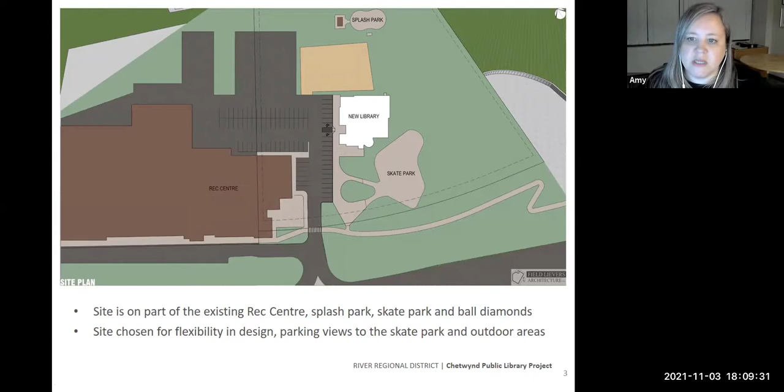The design team considered several locations for the library, including aligning with the rec center and North Access Road, and in the current location behind the skate park. The current location was chosen to allow for flexibility in the design, parking views to the skate park, and to accommodate the outdoor areas adjacent to the proposed library facility. Next slide.

The concept that began with the Library Advisory Committee was the living room of the community. This building serves a variety of functions for the community members, including children's programming on the north side, children's reading and play area just outside of that children's room, a teen reading and lounge area, the adult reading and lounge area with private seating space along the windows facing the park, and a public computer area.

There is meeting space that can be 1 large room or 2 small rooms, a makerspace and virtual reality room that can also be used as a private meeting room, a storytelling room that can be open or closed to the main area as another meeting room, staff areas, a cafe and sitting area, and an outdoor gathering area. Next slide.

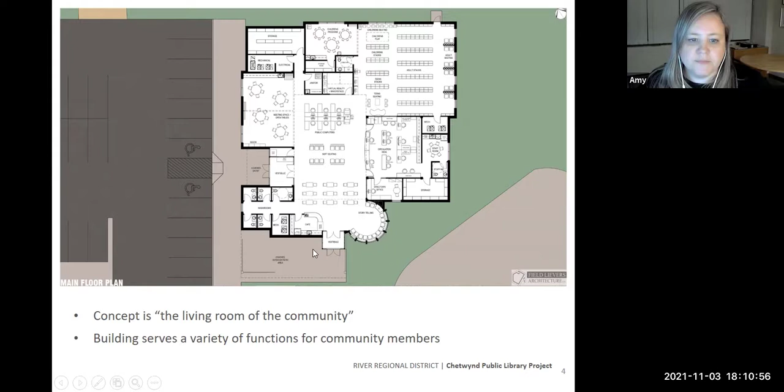This is an aerial view of the new library.

The structural design of the new library building will include a slab on grade with spread footings and grade beams, as a single-story building with no basement or crawl space. The main structure will consist of heavy timber frame with glulam columns and beams with wood infill. The roof will consist of structural insulated panels that span between roof joists, with a sloped metal roof, as seen in the image.

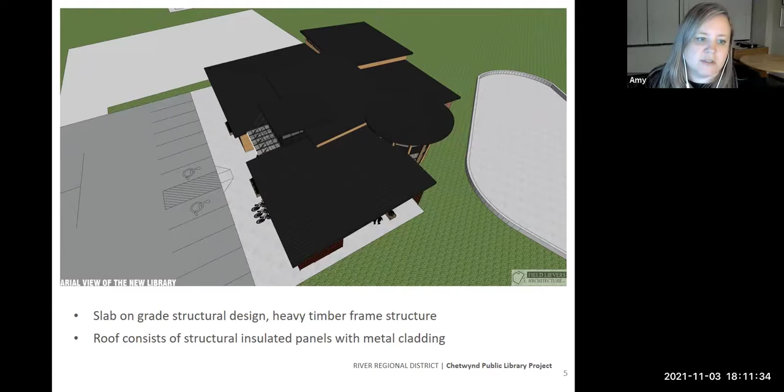This shows the front of the building with the outdoor plaza facing the highway, with a landscaped space in front of the skate park. This outdoor plaza area will be protected from the elements by a large roof canopy.

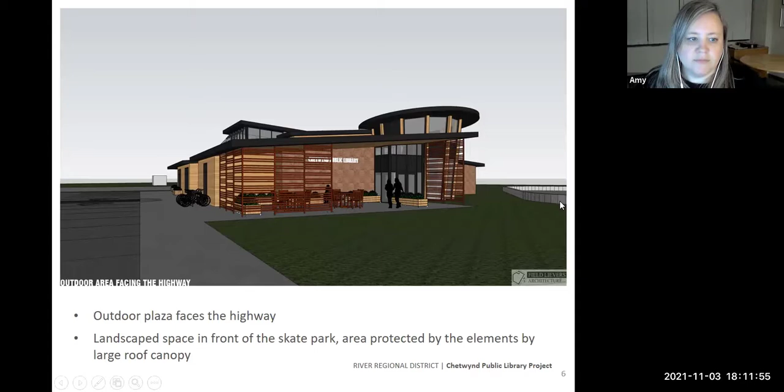The windows will be triple glazed, low E, argon filled, and the roof and walls will have high insulation values for a thermally efficient building envelope.

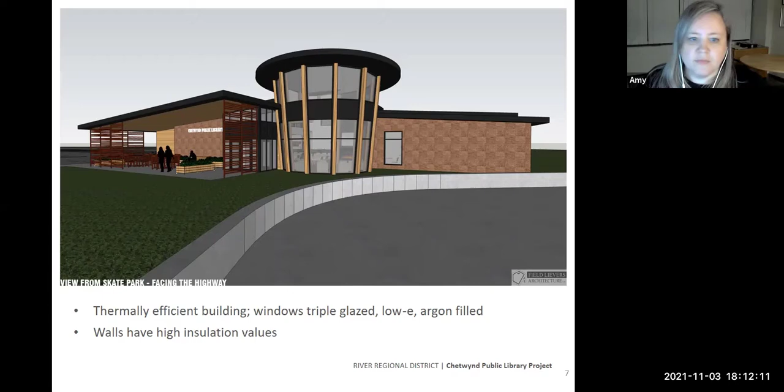This is the west side of the building facing the parking area. There will be clerestory windows at the upper level to bring light to the center of the building.

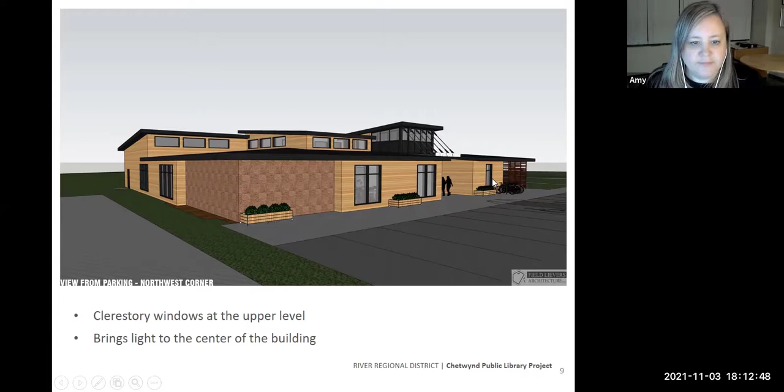The main entry of the building will feature a large expansive glazing with a canopy, signage, and a window for the exterior book drop.

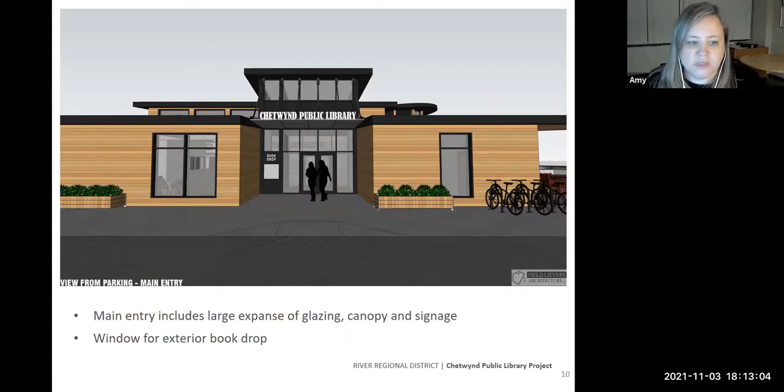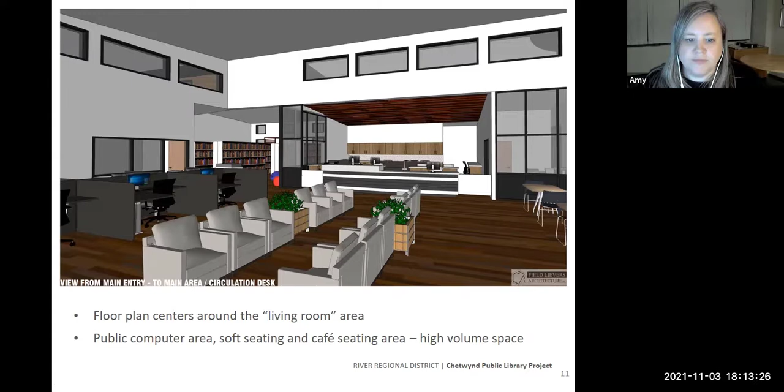This area is the heart of the library, from which you can access the cafe on the right, washrooms, meeting rooms, the storytelling room in the center, the book stacks, and the circulation desk.

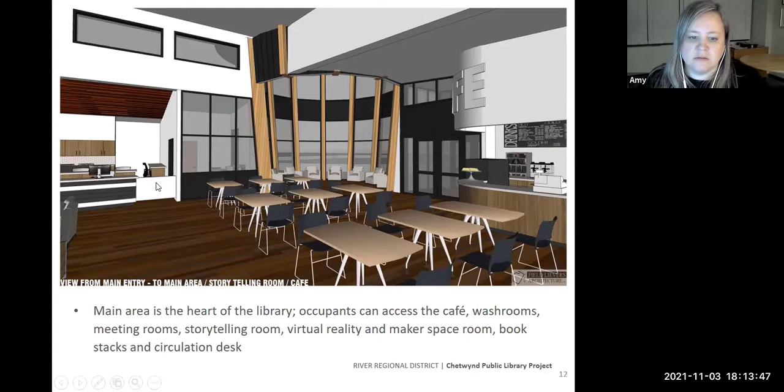This area shows the cafe located right next to the doors that lead to the outdoor plaza, and the open cafe sitting area is open to the storytelling room on the left.

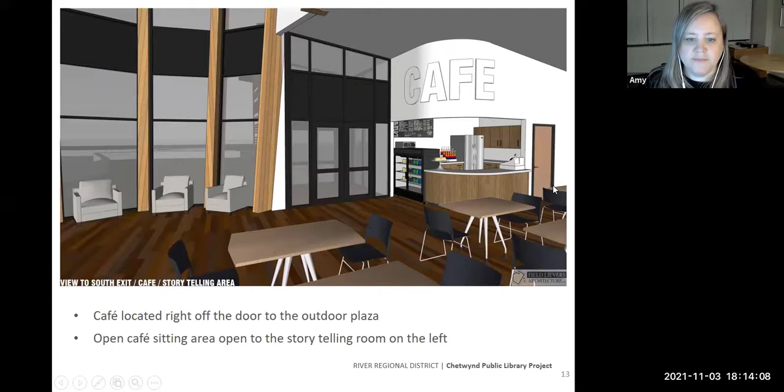The storytelling room is an important element to the design that acknowledges the culture of the Chetwynd area and can be used for storytelling, meetings, and group gatherings, in a space that encourages sharing and acknowledgement of the past and Indigenous culture and history. It will bring people together in an inviting room with a feature fireplace.

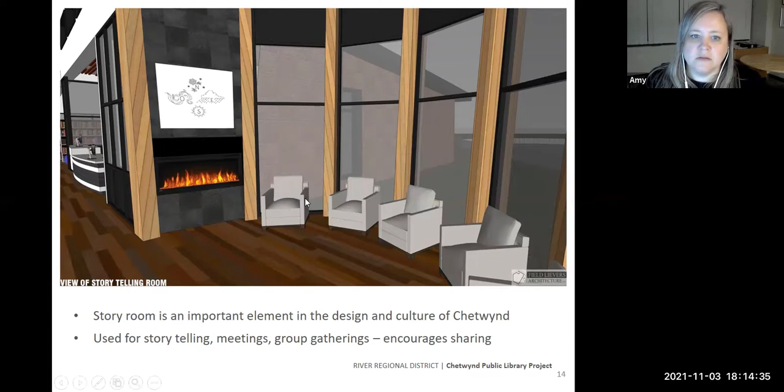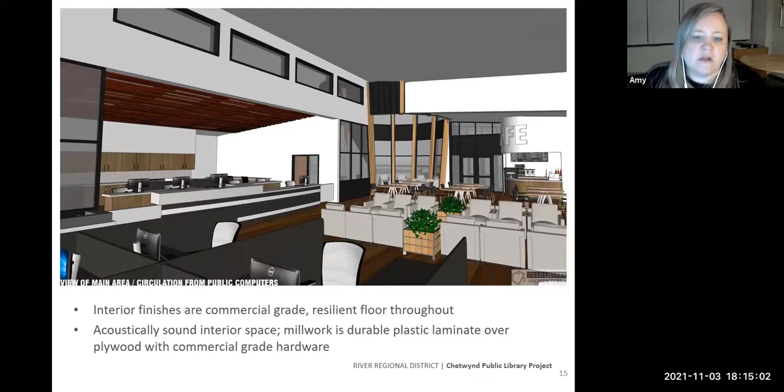Interior finishes will consist of commercial grade, resilient floor throughout, painted drywall walls, vaulted ceilings that will contain lighting and acoustic panels as required. Millwork will be durable plastic laminate over plywood with solid surface countertops and commercial grade hardware. Doors will be solid core wood with a stained veneer finish and painted metal frames.

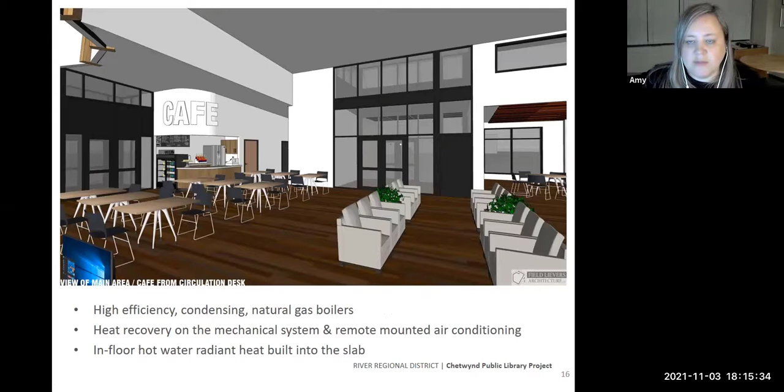The building will have high efficiency condensing natural gas boilers. The air handling units will also be condensing gas fired high efficiency units. We will have heat recovery on the mechanical system and remote mounted air conditioning units. There will be in-floor hot water radiant heat built into the slab, making for a stable, comfortable indoor environment.

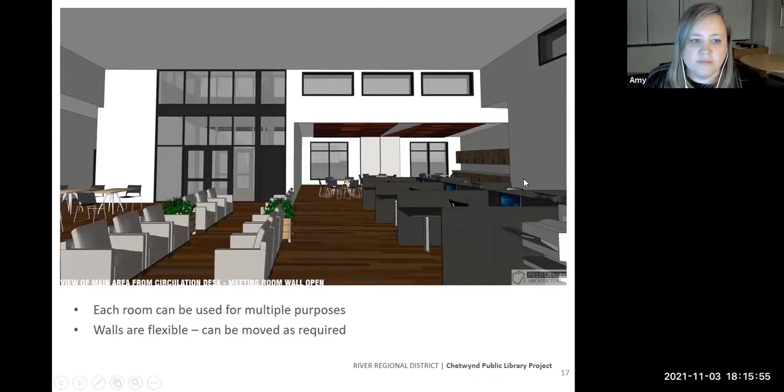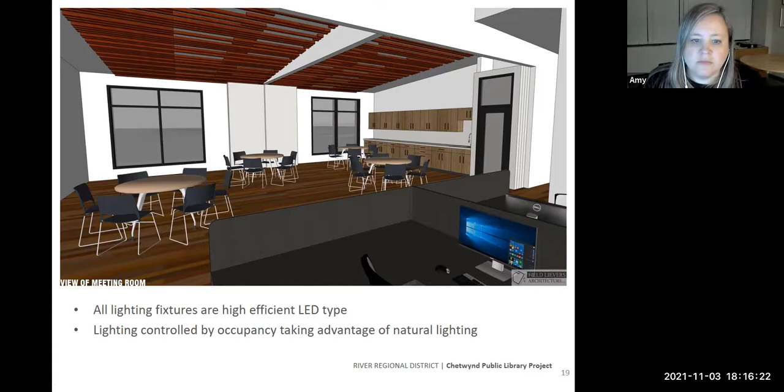Other sustainable building features include high R value insulation, triple glazed low E windows, local low VOC materials with a high recycled content, rain and stormwater management on the site, construction waste management during construction, and future consideration for other sustainable initiatives such as solar panels.

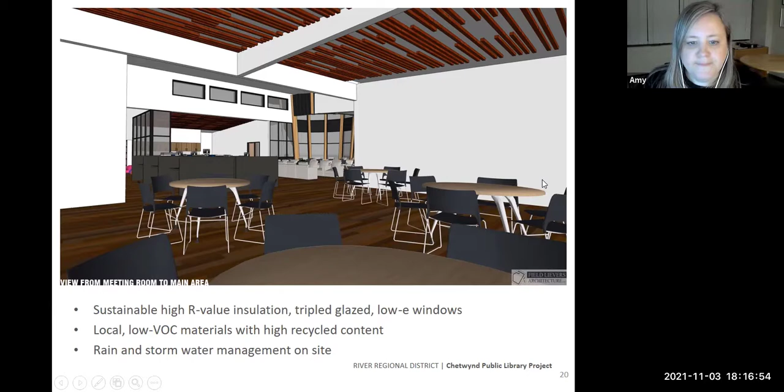This is a high-level view of the reading stacks. Natural light has been brought in to all usable areas in the space, with views to the surrounding park, rec center, splash park, skate park, and outdoor plaza.

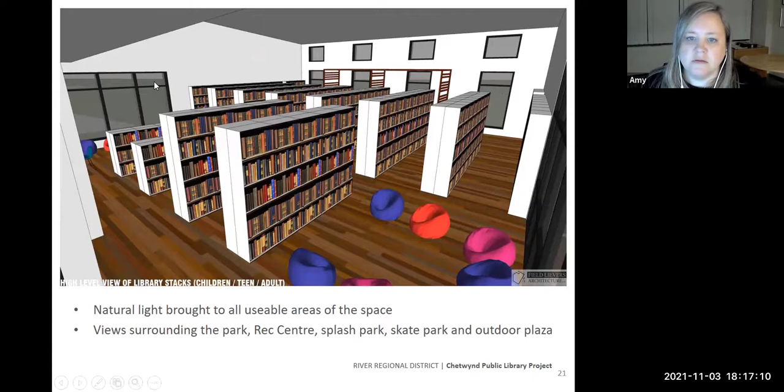The stacks area contains soft seating areas within for each user group, the children, the teen, and the adults, where people can tuck away with reading materials as they wish. This concludes the design portion, and we'll go back to Director Rose.

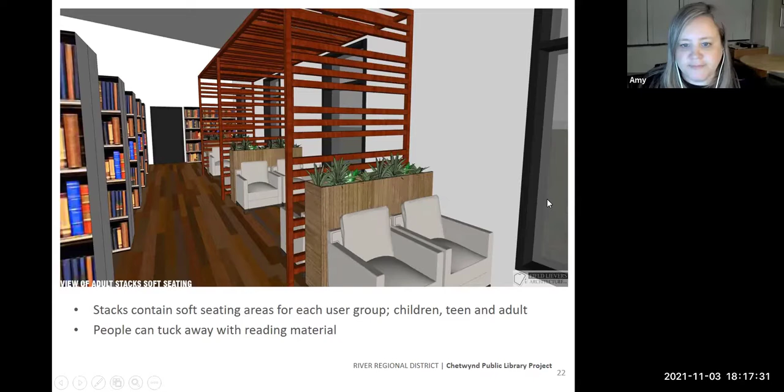Thank you, Amy. The total budget for the new library is set at no more than $5 million. The project will be primarily funded through grant contributions from government and possibly non-government sources.

As the Director for Electoral Area E, I have committed $2 million from gas tax and Peace River Agreement funds. The District of Chetwynd has committed $1 million. Chetwynd Library Board has committed $750,000 in addition to the costs associated with all the furniture and equipment. We are also hopeful we will receive at least $300,000 in other grants. At this time, we are also anticipating some short-term borrowing for up to $950,000.

And that would result in a tax increase for the residents and businesses of Chetwynd and the surrounding rural areas. We will continue to look for grants, donations, and additional sources of funding so that the tax increase can be minimized. We understand that people are concerned about tax increases, and we are committed to keeping increases as low as possible.

The amount of the tax increase depends on how much we need to borrow short term for a 5-year term. Currently, the residential tax rate for the Chetwynd Library Services function is 14.88 cents per $1,000 on land and improvements. If we need to borrow up to $950,000, the tax rate is anticipated to increase to between 20 cents and 22 cents per $1,000 of assessed property value.